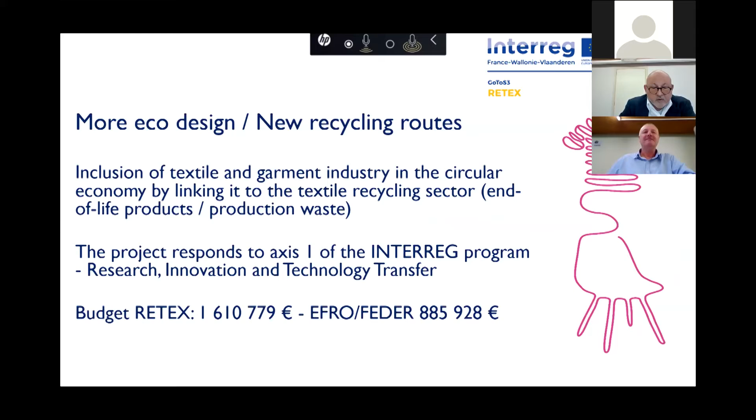The project had a budget of 1.6 million euro, and it was funded by EFRO/FEDER. The main partners were Euromaterials. Leading partner was in Tourcoing as a competitive cluster, and the second part was CD2E, in fact.

Maybe I should first say which region it was. It was the region of North of France, Hauts-de-France. It was a part of Flanders and also a part of Wallonie.

Going back to the main partners, CD2E was the partner who was responsible for the carbon footprint calculations. Then we have Centexbel, well known meanwhile because it has been presented several times, and then Fedustria from the Walloon side, because they had to give us the introductions into the industrial network.

The associated partners were also, for Wallonie, BEFIN, which is in fact a company linked to SRIW, and then also Ressources, which is a recycling cluster in Wallonia, which gave us the raw materials, the end-of-life clothing, which we used in our processes to recycle and do the project.

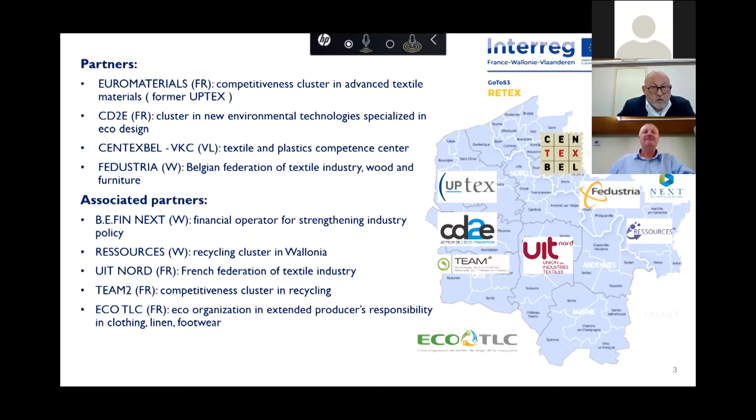And then you also see UIT Nord, which is the equivalent of Fedustria, but in France, and also Team 2 and EcoTLC, also two French groups, let's say.

When you are talking about textile recycling and textile recycling routes, and you go down to the industrial reality, you have three main routes to recycle your textiles and end-of-life clothing. When I say textiles, I mean industrial waste and also end-of-life clothing. You can have chemical recycling, thermoplastic recycling, and mechanical recycling.

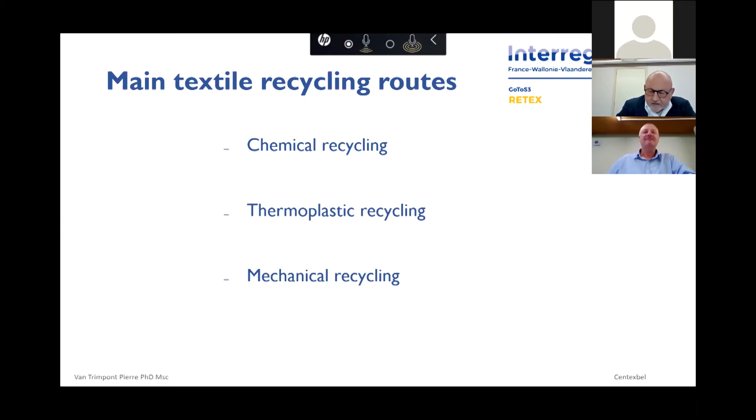Due to the fact that we were working in our region, being partly Flanders, partly Wallonie, and also the north of France, we didn't focus on chemical recycling because we don't have a Rotterdam or an Antwerp in our region. So we didn't have a huge chemical industrial infrastructure to use. What we used in our project was thermoplastic recycling and also mechanical recycling, because there we have the industrial support.

What we are going to discuss today, and what we did mainly in RETEX, is the mechanical recycling of polyester-cotton blends of end-of-life clothing. We go into detail on this project. What we are not going to discuss today, because time is limited, is 100% cotton industrial waste and mechanical recycling, but you can always ask me questions in the Q&A. We are also going to discuss and explain the thermoplastic recycling of 100% polyester waste, being either industrial waste or end-of-life clothing. We have done both.

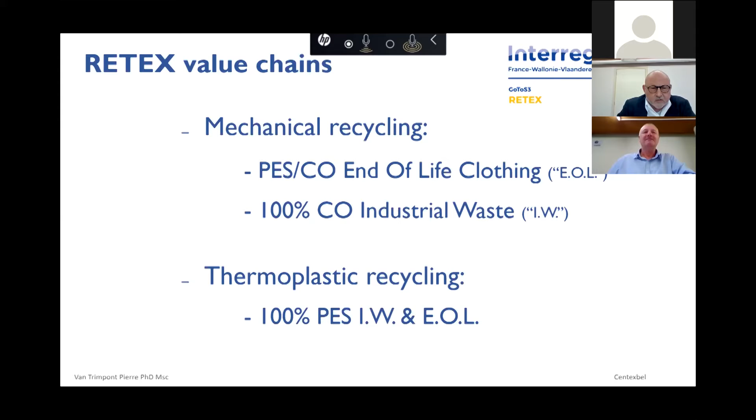Let's start with mechanical recycling of polyester-cotton textile waste streams. Our industrial value chain - the role of Centexbel was to find the industrialists who are interested, bring them together, make them work together, not always evident, and then make products. Make products that at the end of the day, with existing processes, are commercially viable. I mean technically viable, but also economically viable.

Very importantly, not only did we want to use the existing processes as much and as far as possible, but we also wanted to have a viable product, because we started from the assumption that when you want a recycling industry which lasts into the decades and into the future, you should be economically viable. You cannot continue living on the taxpayers' money or all kinds of subsidies. You have to stand alone yourself without any external help.

The industrialists who worked with us were Van Moer, who delivered the hospital clothing, which was in fact end-of-life clothing coming from industrial laundries. This clothing was unraveled at Minot in the north of France, an unraveling machine where we made the basic fibers, which were baled and sent to Utexbel, which made then yarns out of those fibers, and then also the fabric.

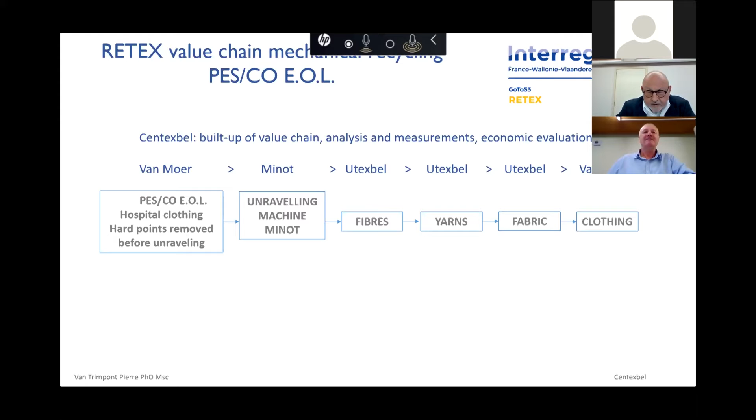Correctly, let's say. Here you see what we used. We got from the industrial laundry, we worked with one industrial laundry, but we got all kinds of hospital clothing in our batch from several hospitals. You get trousers, you get vests, always with hard parts, of course, buttons, RFID tags, zips sometimes, with also all kinds of embroideries and colored parts, with an average composition of 2/3 polyester and 1/3 cotton.

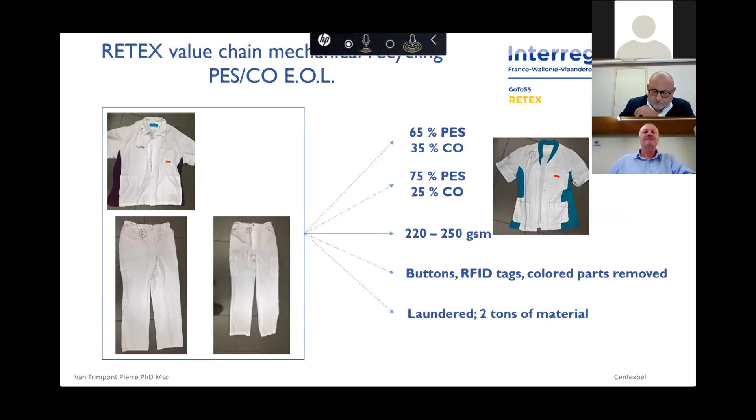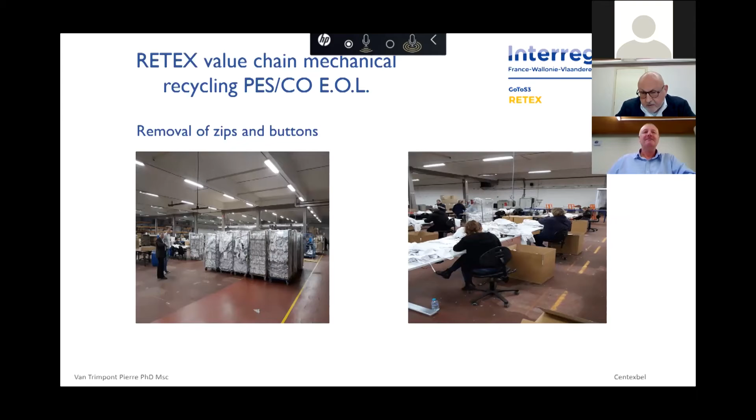On the right-hand side, we removed then the hard parts. It's in a social workplace, atelier protégé as they say in French, where people learn to remove the hard parts and the RFID tags. I give here a few examples.

Because if you want to have an industrial spinner spinning your fibers at the end of the day, he has to be sure there are no hard parts in your batch, because otherwise the spinning mill is going to be destroyed and you're not going to be in business.

It's clear. So on the left-hand side, you see the clothing coming at the unraveling plant with the guy standing in the middle of the clothing. It's me. And it's ready to be unraveled.

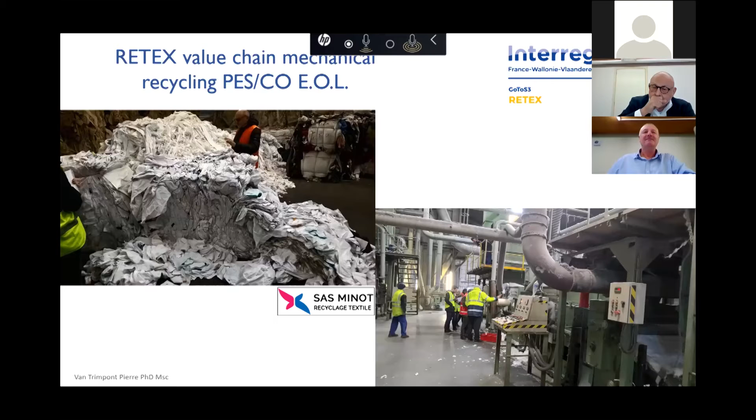On the right-hand side, you see the unraveling plant with our colleagues from the partners, which we came at the end of the day, friends after 4 years, at the Minot in the north of France.

After unraveling, you have the fluffy material, if I may call it that way, the fibers, and the unraveling was very soft. Very important point: we tried to have a good unraveling, and with good, I mean with a residual fiber length which was long enough, between 2.5 to 3 centimeters, to be spun again.

And the spinner was present, so we adapted the parameters until we got the good parameters to have the good fiber length. And as you can see on the left-hand side photograph, there are still some colored parts in it, because all the colored parts were not removed. So we had to use it as it was.

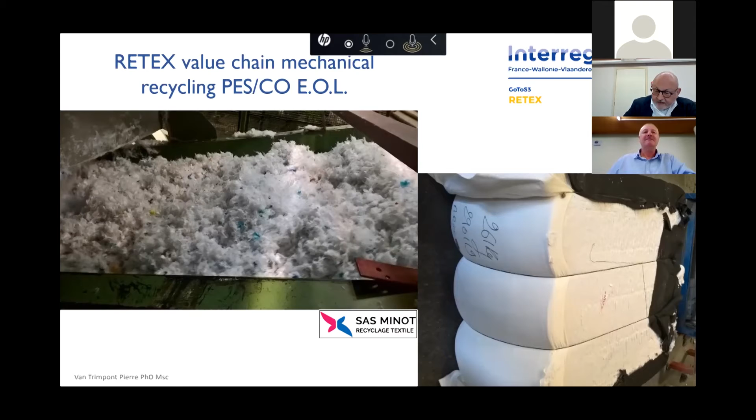Right-hand side, it was built to go to the spinning mill. That I already explained. Maybe important to say here is that, when you unravel, you eliminate a big part of your cotton. Your cotton is dead, your cotton has been treated, in fact,

has been laundered in very harsh industrial conditions, which makes the cotton not useful anymore after unraveling. You see on the right-hand side, for example, we have a lot of dust fraction coming from unraveling, and that's very cotton rich. On the left-hand side, the fiber fraction, which is going to be respun, is richer, and it will still become richer and richer in polyester.

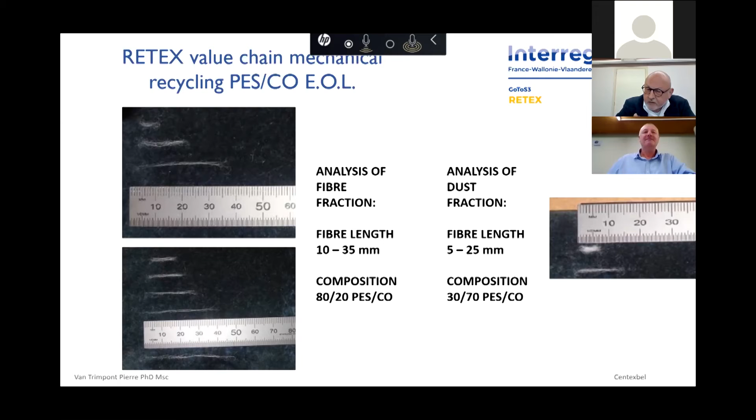So you lose en route the cotton, which has to be replaced once you are in the spinning mill. When you arrive at the spinning mill, we have spun a yarn.

I am going to make a resume here because it was a long peregrination before we got there. But let's say we made a metric.

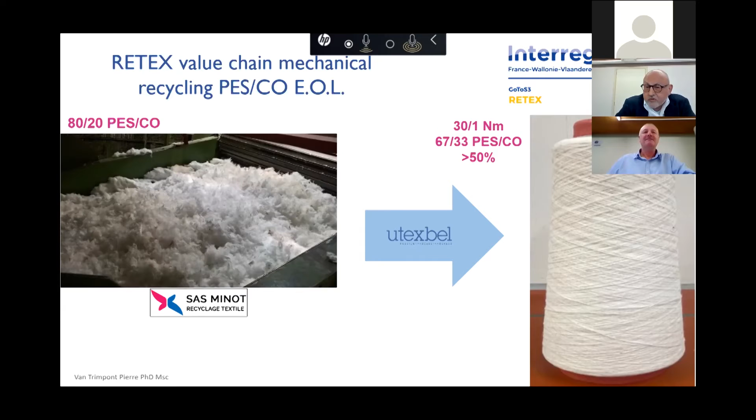30/1 Nm yarn, with 2/3 of polyester and 1/3 of cotton. All the polyester is recycled, so in fact it's more than 50%, mathematically 67% of recycled material. All the PES, all the polyester, is recycled, and the cotton has in fact been eliminated as dust. You find almost nothing back anymore, so you have to add virgin cotton to make the yarn again.

And that yarn has then been woven, and again, the hospital cloth was made and presented on the stand of TCBL at the Textile Fair of 2019. They call their product Dr. Green, and it's a product now in the market, they sell it. So in fact it's a nice example of industrial circular economy, but no longer just explanation.

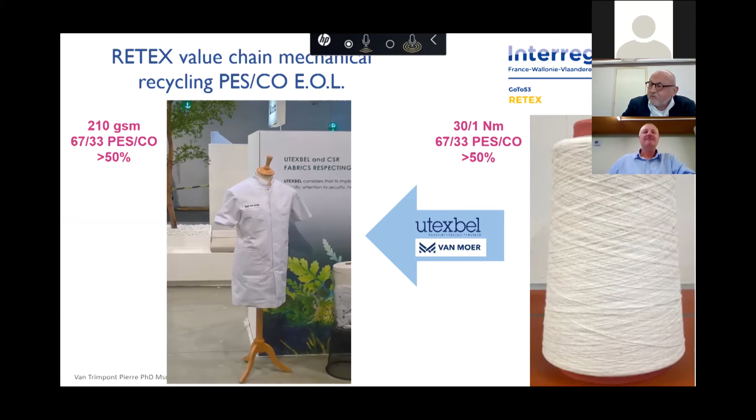It's a real product in a real market, which is viable because the company is continuing working on it. And I saw it recently, they still are using the same value chain as the one we mounted for TCBL in the past, except the unraveler is another company.

So to summarize the polyester cotton, you have to unravel in a very soft way to maintain the respect of the fiber length. You still have to work with homogeneous waste streams, because we made also lots of tests with domestic end of life. I cannot discuss this here, it's not feasible industrially today. You have to have more sorting.

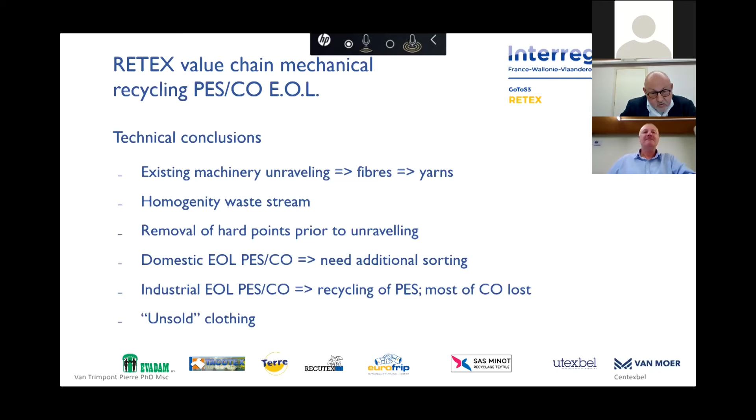But let's start with the beginning. Industrial laundries are a perfect way to start with this process because it's viable, and also with big companies, because company A is not going to wear the workwear of company B. So big companies can also be used as source for material to be unraveled.

We also made an economic calculation on the project to see if it is economically viable. I will go very shortly to it. What we have on the left-hand side is the same process flow as I explained. You have the unit cost prices, the masses going in, the masses going out per step of process, and you see you're losing mass en route because you have dust and removal of hard parts. You lose 13% when you remove the hard parts.

You lose 15 to, in the worst cases, 25% at unraveling. And then when you start spinning and carding and making the sliver, you are losing again 27%. So that makes that you have a price of 1.6, but it's hidden in my case. On the right bottom side, you have a price of 1.63 euro per kilo of unraveled material coming out of our test.

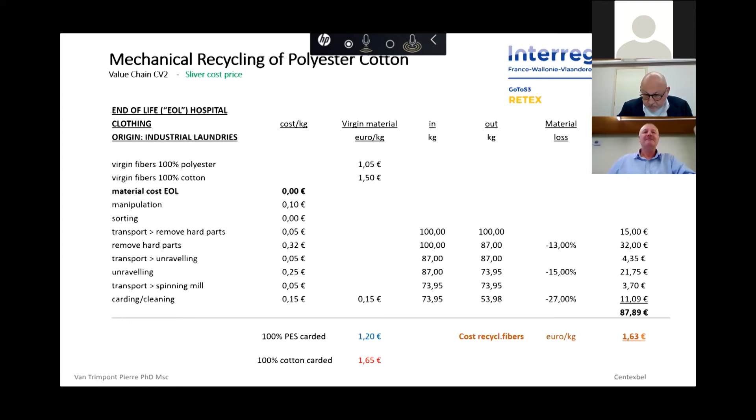What we did in the industrial plant is then make a sliver, because we made our calculation of cost price on the sliver level for the 30 metric yarn. We made a combination of slivers to make our final yarn at the end.

It was composed of 25% of effiloché, or unraveled material from RETEX, 25% of industrial waste coming from the spinner itself, which was almost at zero cost because he reused his waste from his own spinning plant. We still had to make the balance of the 67%. We added some rPET from bottles, but this was all in fact recycled - either RETEX, or waste from the spinning mill, or bottles. The only virgin thing was the virgin cotton which had to be added.

And then, of course, when you make the calculations, you get a positive margin, a gross margin of 7.5% on the sliver cost price base.

I made also a kind of quite theoretical calculation on the influence of logistics, because we have to drive from A to B, and from B to C, and then from C to D, and then from D back to A, maybe sometimes. If you eliminate all the logistics in your process, you gain 4 more basis points in your margin.

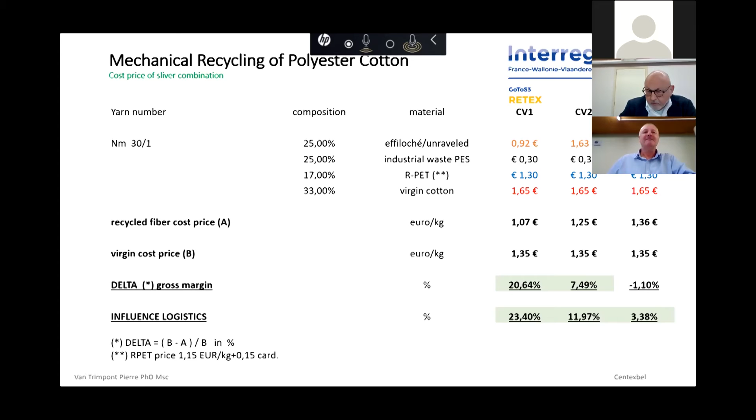We also looked at the influence, the sensitivity, the price sensitivity of the waste removal price.

We got our laundry hospital clothing at zero cost, delivered to us free. But of course, if you start asking money for waste treatment, say 100 euros, that's shown as minus 100 in my slide, then your margin goes up from 7.5 to 10.9, etc.

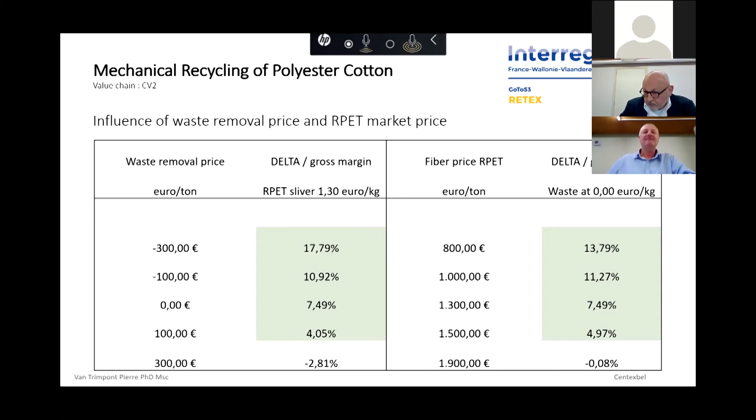On the right-hand side, you see the price sensitivity on RPET prices for the RPET yarn, which is added to the sliver to make your final product. When prices go down, you become more profitable. But if the RPET price you have to add to your final yarn goes up, you start losing profitability, and you go out of business at 1,900.

So the conclusion is we have to work on homogeneous streams. We have enough laundries and industrial workwear to start with, but it's end-of-life workwear. You have to have more sorting research on the domestic end-of-life stream. Of course, oil prices, which are very low, are always hampering the profitability of your model.

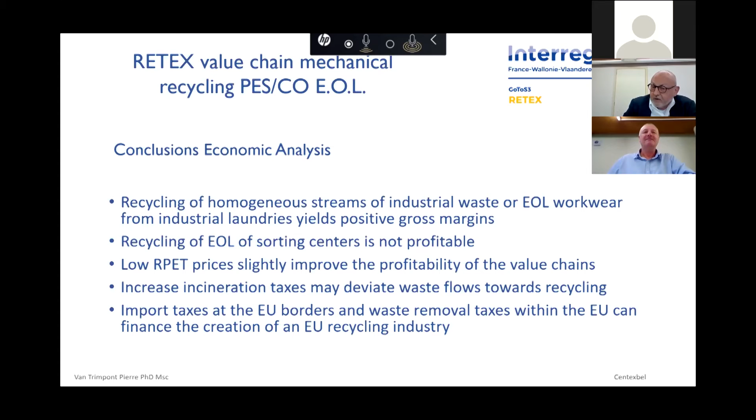We also made some calculations, though it's not the subject for today, on incineration taxes and incineration cost. It's not too far away anymore from the cost of just mechanically recycling. So diverting existing flows today is not so theoretical anymore.

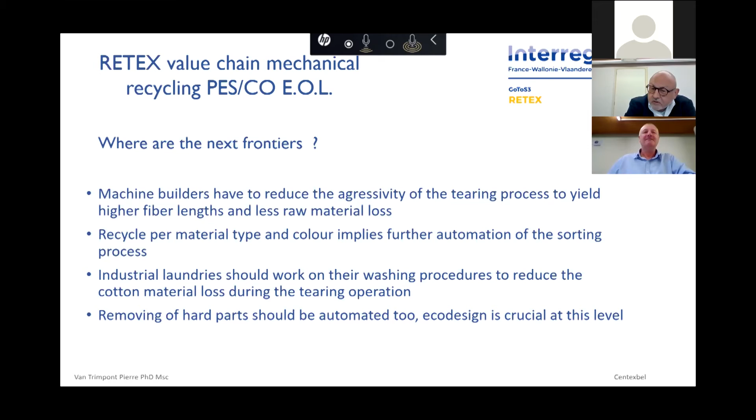What are the next frontiers to go into full industrial gear? We need machine builders adapted on their unraveling machines to make a softer tearing process for a better, longer fiber length. Our industrial laundries should launder in a less aggressive way, because then we can recuperate part of the cotton, which is now reduced to dust, but could be a valuable flow making your process even more profitable. And removing hard parts needs more normalization, more eco-design, so we lose less time removing them.

We go to the second and last part of my presentation: thermoplastic recycling, but this time not of mixtures of polyester and cotton, just of 100% polyester textile waste streams, whether industrial or end-of-life clothing. How did we treat them?

Sometimes we have to prepare them by removing the hard parts in the case of used clothing, and sometimes you have to purify or clean something. Then the first step is shredding or unraveling. We also had value chains involving unraveling, but there's too long a story and not enough time to talk about it here - we're focusing on shredding or unraveling.

You receive a fluffy mass. This fluffy mass is then compacted into pellets, and those pellets cannot be used right away. They have to be dried and recrystallized before you can put them into a thermogranulation line and make granulates. Then, once you have the granulates, you can start extruding or injection molding.

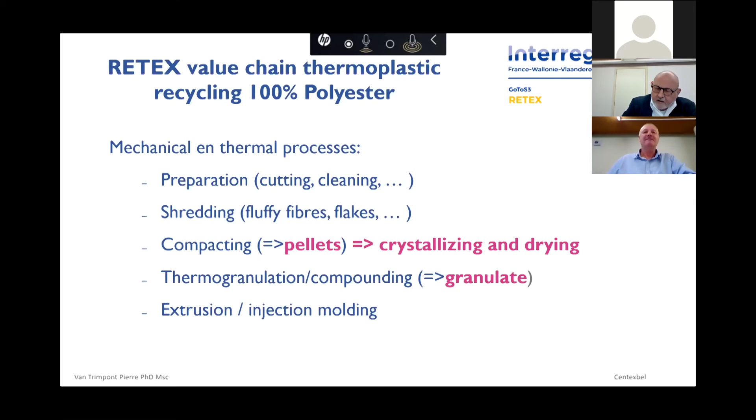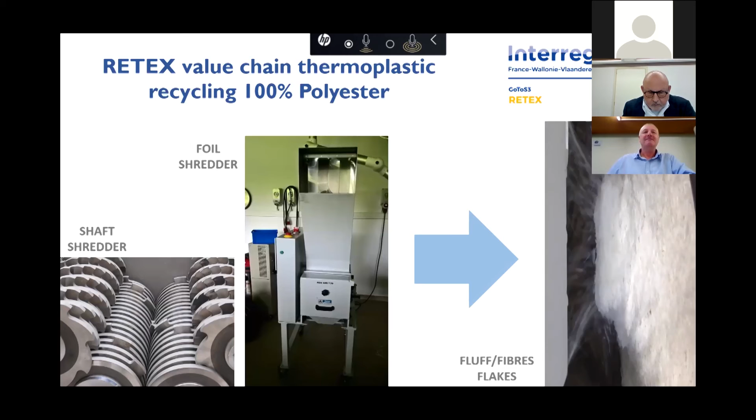This happened mainly at the compacting, granulation and extrusion stage at VKC, which is a daughter company of Centexbel in Kortrijk. Here you have some photos of the operations - you see the shredding plant, making fluffy fibers or flakes from it. This fiber or fluffy material is then compacted in a Kahl compactor, also standing at Kortrijk, which is a very important step.

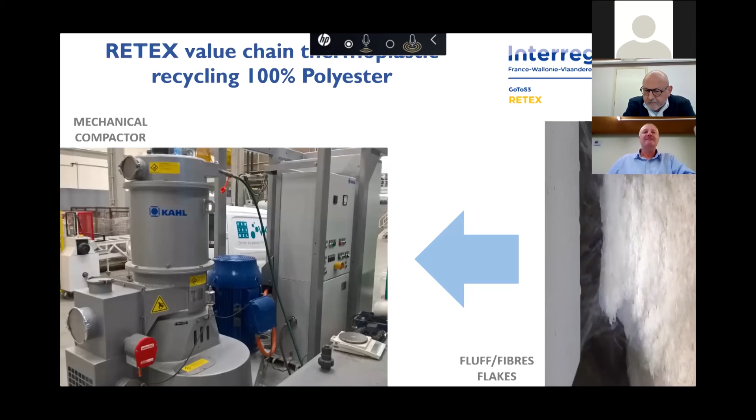This compacting effect makes pellets - you see them on the right-hand side - and those pellets have to resist abrasion. Now, the compacting stage is a very important industrial stage.

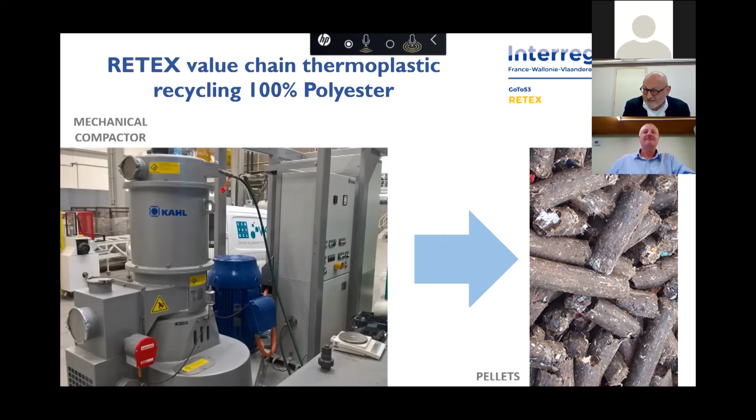First of all, it's a heat-producing stage, which degenerates your intrinsic viscosity, so the cooler you can do it, the better. Secondly, your pellets have to be compacted enough to resist abrasion in the next steps, because if you can do that, you could eliminate the drying and recrystallizing step.

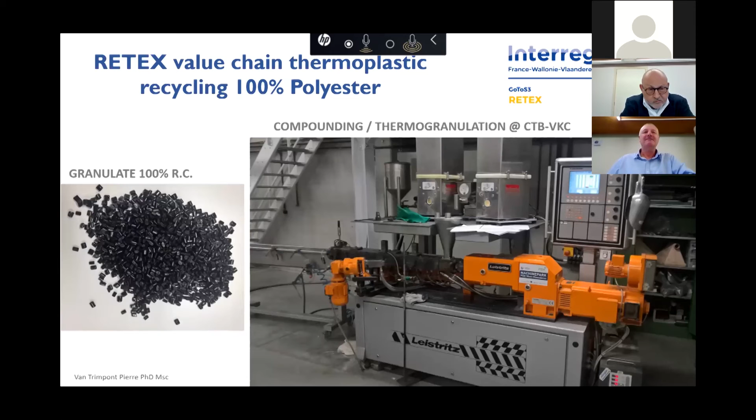You could eliminate this step, because otherwise we have to pass through compounding and thermogranulation, which again degenerates your intrinsic viscosity. So if you can eliminate this and go immediately to extrusion - which we have done with some pellets - you gain time and money, and partly avoid the degeneration of intrinsic viscosity. You're going to see why I'm talking so much about intrinsic viscosity in the next slides.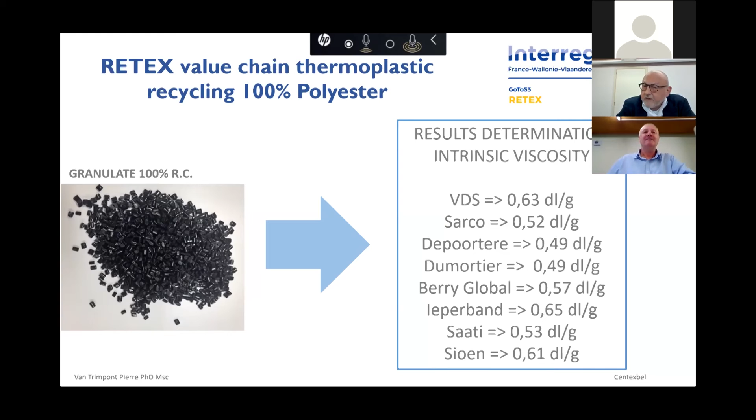We repeated that operation 8 times with 8 flows coming from 8 industrialists from the EU region we worked with. All the flows are industrial waste, except the second one, which is end-of-life clean air suits, 100% polyester, where we first had to remove the hard parts. We didn't do anything with the pigments, we just used it as it was.

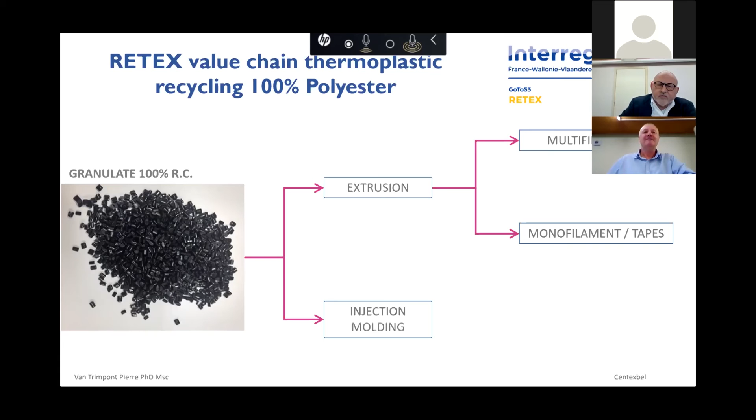What did we do then with the granulates of 100% recycled material? We extruded them to make multifilaments or monofilaments, or made some profiles out of it through injection molding.

What did we see? The results were not good enough for an industrial process, not good enough for a commercially viable product. Why? Because you have too much reduction of the intrinsic viscosity, which yielded reduced processability, and it was also too brittle.

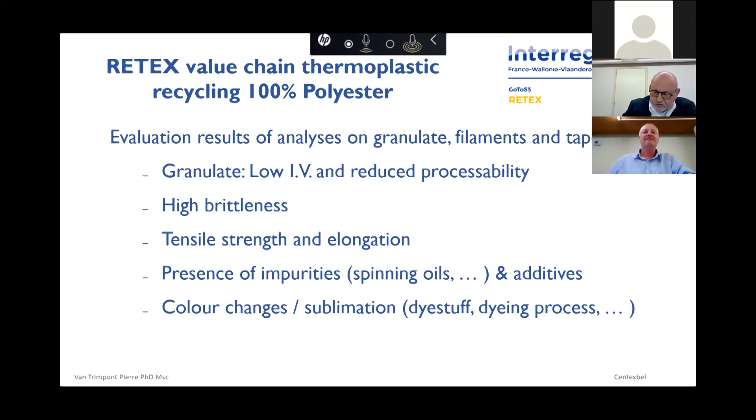Tensile strength of the yarns, I'm talking about the multifilaments, were not good enough to be processed later on. So we had to do something, and I'm not talking about the last two points because there are also from time to time problems.

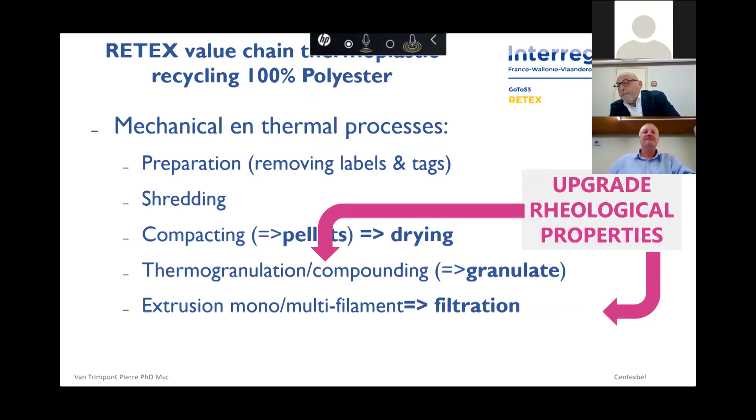What did we have to do? We had to add something - a rheological agent, what we call a booster, to upgrade the rheological properties, which we did at several stages of our process.

As I explained, we start from clothing, remove the hard parts if needed, make fibers out of it by shredding them to get fibers or pieces. Then we could go the pellet route directly to extrusion, or make granulates, and then go to the multifilament.

What we did on all those routes is add some viscosity booster to see if we could then make a better product.

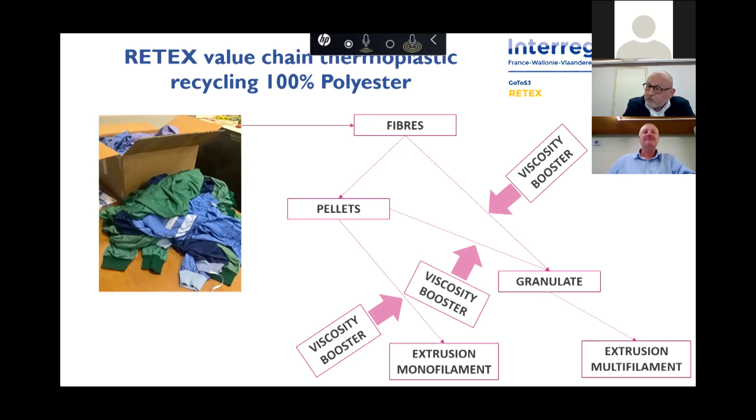What we also did is contact the compactor machine builder. We made, in Germany, with these machines, new pellets which were made in a more cooled way, so there was less reduction in the intrinsic viscosity.

As you can see here, our shredded fibers are at 0.67 deciliters per gram intrinsic viscosity, and those compacted fibers normally fell to 0.5 through our machinery. Here we got 0.6, so almost no influence on the intrinsic viscosity - but these were the pellets coming from Karl, the machine builder itself, in Germany in his lab.

So as you can feel already, machines have to be adapted to do that kind of process.

We made some granules out of those compacted fibers, but we had to add 2.5% booster, and we got a filament which was processable on the machine. You have already seen several times on photographs, and this morning, up to 40% recycled material.

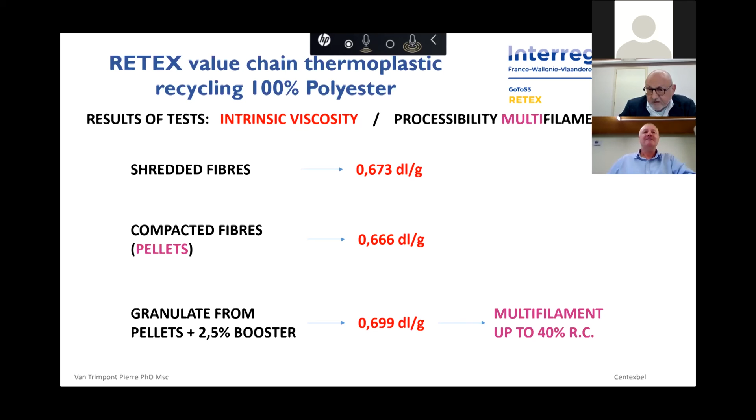But to cut a long story short, this multifilament was not, let's say, commercially and technically good enough to go into the industry. As you can also see, the intrinsic viscosity is kept at a good level by the booster.

Where we did succeed in our tests is in the monofilaments, where with the same compacted pellets - the cool compacted pellets, if I can express it that way - we got good results with 47.5% recycled material, 47.5% virgin polyester, and 5% booster. There we could make a good monofilament.

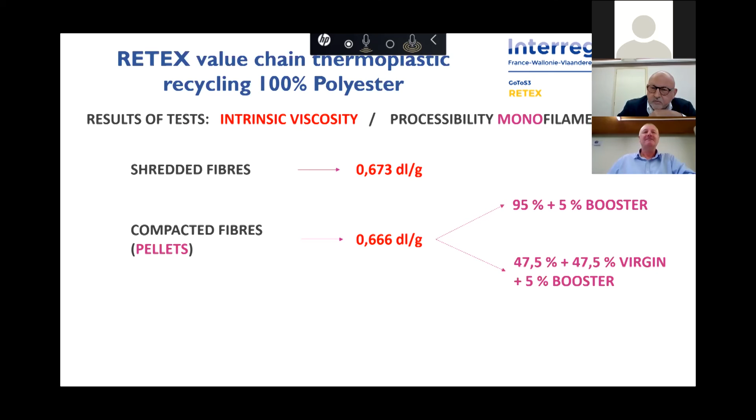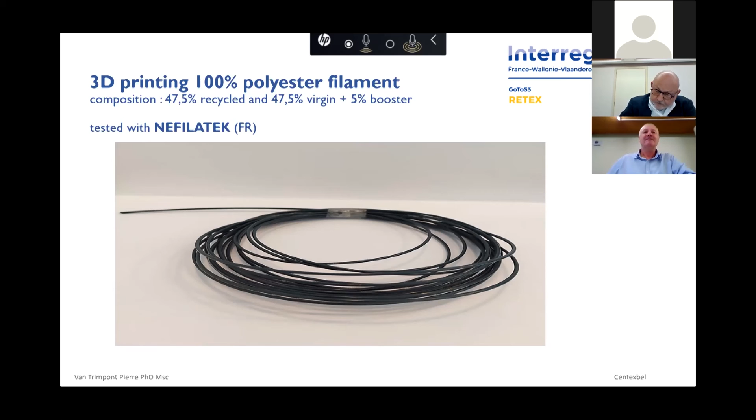The commercial model is a Canadian company in Quebec, but they have a French company in the north of France. That filament has been tested on their industrial 3D printing machines.

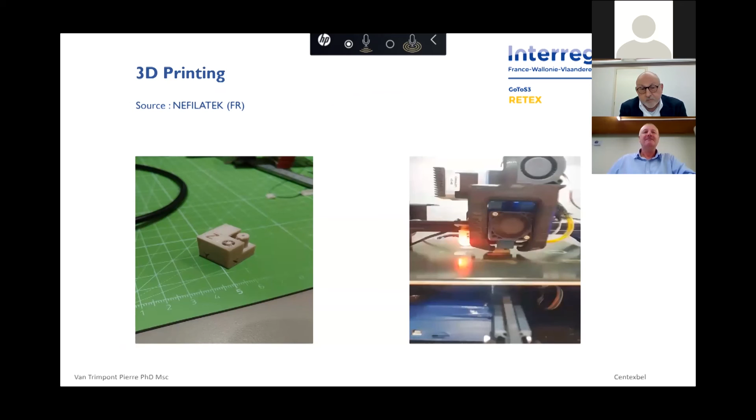On the right-hand side, you can see the YouTube film on our website, because, of course, like every project, RETEX also has a website - you will see it at the end of the presentation. We could make some products there. It was quite promising in 3D.

And again, we made the calculations on the viability of the process using the same logic. On the left-hand side you have the different process steps, then the unit prices in the next column, and then the ins and outs per step, and of course the calculation per ton of recycled product.

We were around 800 euros per ton for the recycled product, polyester base per ton, and you have to compare that in the upper part of the slide with the RPET chips, because we calculated our cost price for the chip of the granulate. Our 800 has to be compared with the 1150 for the RPET and the 1390 for the PET virgin chips.

To be clear, those prices are dating from the second half of 2020. But I can assure you today the margin is even better, because the RPET price today is 1300 instead of the 1150 shown at the top of the slide, and the 1390 has become 1450 to 1500 euros today.

That means the margin you see on the lower part of the slide, 343 euros gross margin profit per ton of RPET, is even today about 150 euros more than that 343.

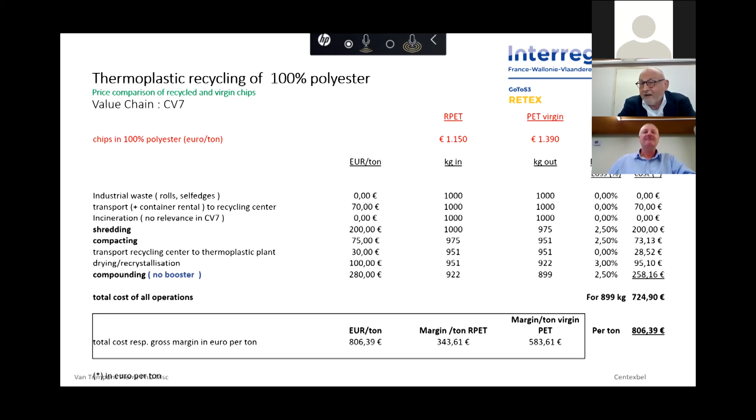I didn't mention it for the mechanical recycling of polyester cotton, but all the figures I showed you in the first part of my presentation are today notably better, because prices of polyester and cotton have risen tremendously. Cotton, in fact, is more than 50% higher in price than last year. So we are in an economical context today which is certainly good.

What we see here is the price sensitivity on the booster. You see that when you go beyond 2.5% of booster, we use 5%. By the way, for the monofilament, at 5% you're getting out of business. That's for an RPET price of 1150.

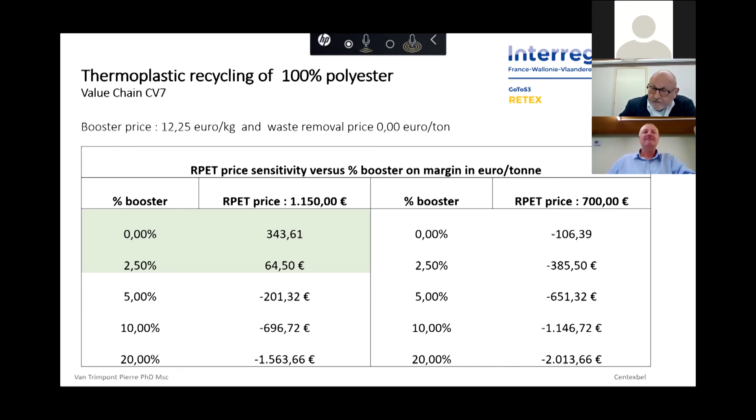On the right-hand side you see the same calculation but for a very low RPET price, 700, which was reality in the beginning of COVID, when RPET prices were almost half. Then you see that recycling is zero, it doesn't work anymore, profitability is non-existing. Here also for the waste removal price, same exercise as previously, where we see if we ask money for removal of the waste, we improve our profitability.

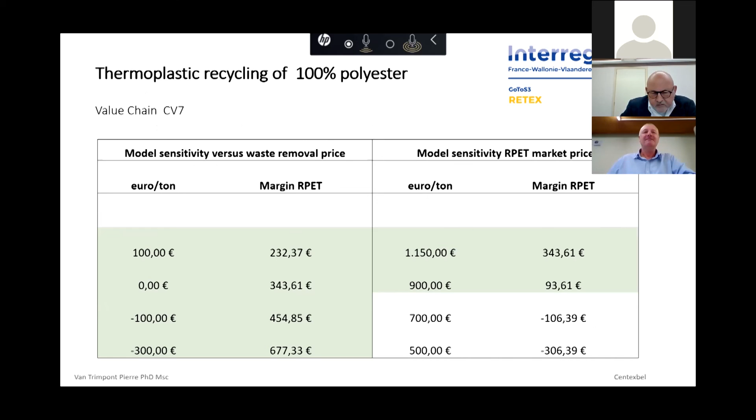I'm going to go a little faster because time is pressuring me. So the conclusion is that basically compacting is a very important step where we should work, because then we eliminate the granulation for lots of cases, which makes the process cheaper.

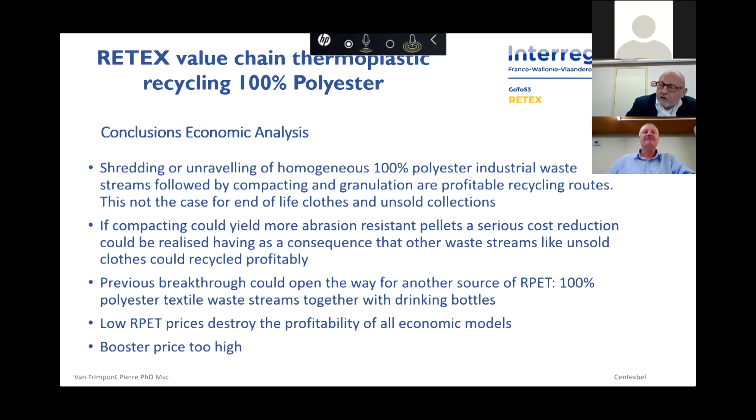What we also see is low RPET prices kill the whole thing generally, and the booster price is too high. That means in the next frontier, if there are industrial priorities to be set, maybe we should work on installing more additional production capacity to make lower booster prices. The best thing is to completely avoid the booster addition.

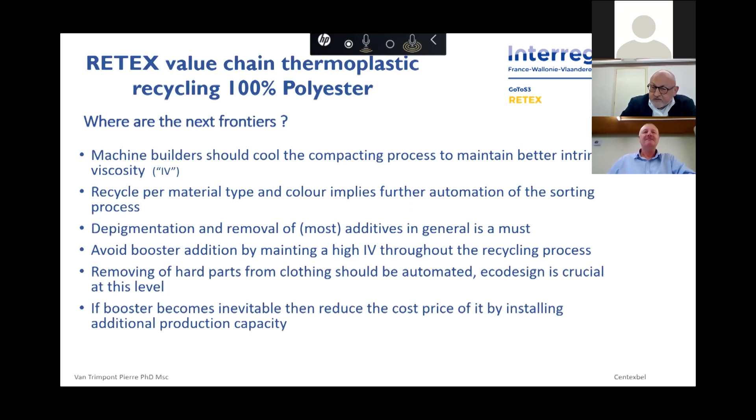That brings me back to the compacting step, and of course the eco design of end-of-life clothing stays important too. Just to boast a little, it's also a side project we did with Van Moer, Wear2Go, Centexbel and Arcor. We made some tests in the dismantling of hospital clothing, but with the Wear2Go stitching yarn in the oven.

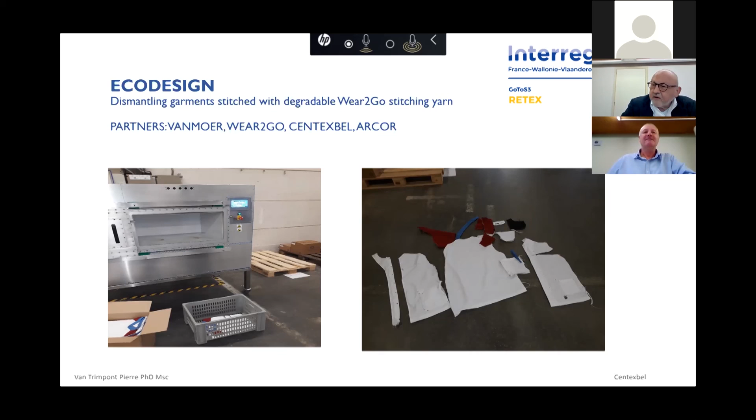What we learned there has been used in the next project, called RETEX, with Centexbel and Wear2Go and a few other partners I forget. We learned several things there. One of the most important was that if we want to be successful, we have to first have a drying stage before irradiating the yarn. It's a very important step, because that allowed us to work in a much better way.

And then here you see the social workplace where we made all kinds of tests in dismantling the yarn and clothing. Thank you for your attention.